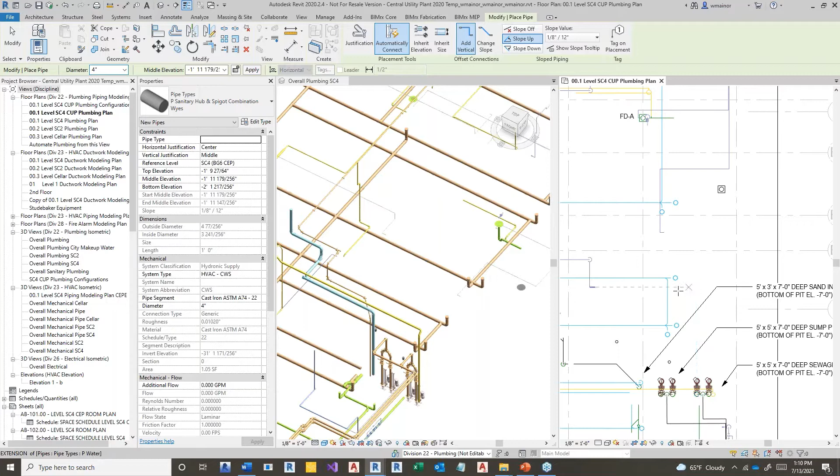So I wanted to model sanitary. Okay. Just like a power user, I'm going to heavily rely on keyboard shortcuts, and we'll talk a little bit about that in just a second. Draw some sanitary pipe. And in this case, I think I'm starting from the bottom. We've got an ejector pit where I'm just going to pinpoint. I'm not going to go very far. I'm just going to put an elbow in. The less button clicking I can do, the better.

The pipe that I drew doesn't have the right system, so let me fix that. We're a plumbing sanitary system. And I just want to make sure that the offset of this pipe puts me, I'm drawing some below ground pipe. So let's bring this down to something like -3 feet. Okay. So I didn't draw very much. And what I'm going to do is use an out of the box workflow where I can take the elbow that I drew and turn that into a tee.

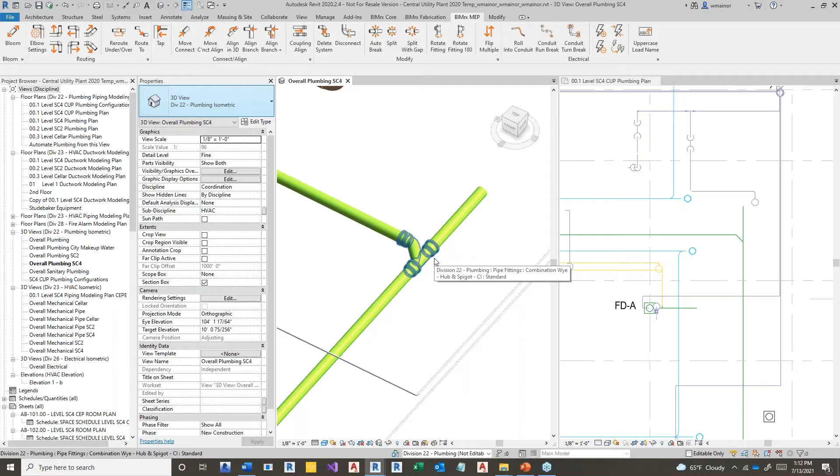Now BIMrx has a command called Bloom. And you can see here I've assigned it to a keyboard shortcut. So I can type my keyboard shortcut, and the Bloom command is going to extend duct or pipe out of every open connection that the fitting or the mechanical equipment or the plumbing fixture has. And furthermore, if the pipe that I drew had a slope on it already, then when I converted the elbow to a tee, the connector on the tee had a slope, and the pipe that extends out is naturally going to have a slope as well.

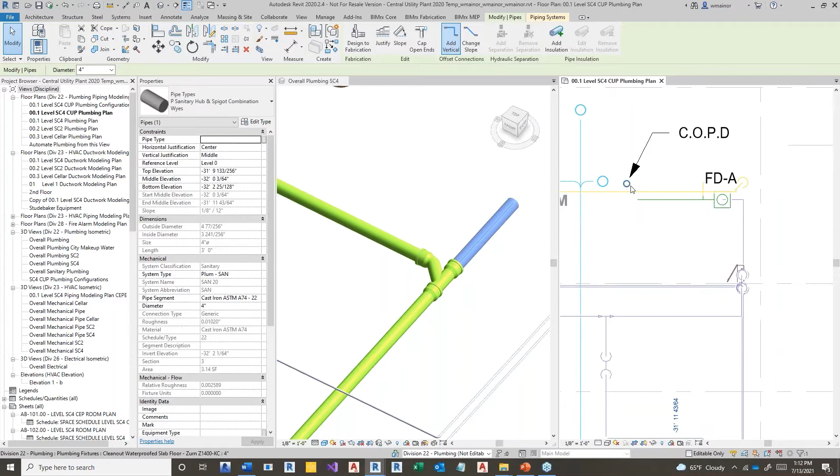And now I'm saying to myself, if this pipe needs to connect, maybe I've got a floor cleanout that I want to attach to, then I can start using commands to quickly draw pipe in different directions.

So BIMrx has an elbow up command, and I'm going to type the keyboard shortcut to draw elbow up. What it does is simply draw a vertical piece of pipe attached to my horizontal run, and it connects the two with an elbow without breaking the slope, just so I can put a vertical rise in.

Now I'm going to zoom out a little bit so we can see what happens. BIMrx has a command called move and connect, which allows me to click on an object that's in the right place, one that has an MEP connector. And I can click on an object that I want to move to it, in this case, the vertical pipe. It stretches the vertical pipe to attach to the clean out, and moves that horizontal run all the while without breaking the slope.

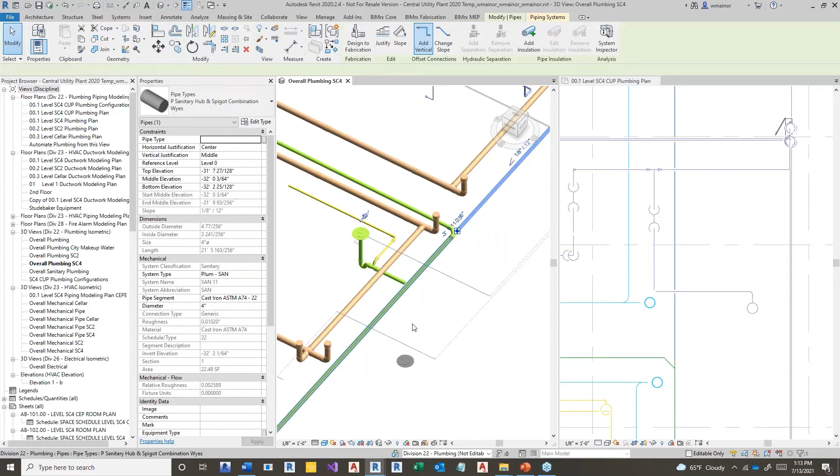The same is true for the pipe that's downstream of the T, and the same is true for that branch line I drew earlier. If I've got another clean out that I need to connect to, I can use my elbow up command and my move connect command assigned to a keyboard shortcut. I click on the clean out, and I click on the vertical pipe, and then it moves the second thing to the first.

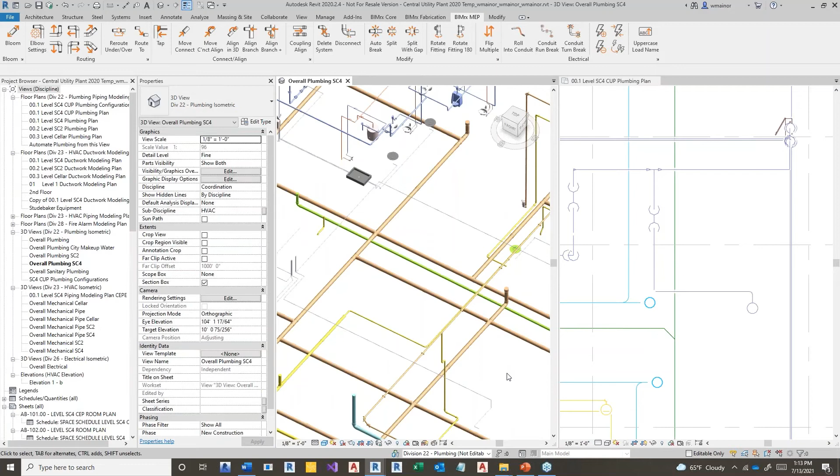You can actually see, if I were to undo that and redo it on the floor plan, you notice how it's not affecting the main. We're really minimizing the effect. I'm going to keep demonstrating this because it's something we focused heavily on, ensuring that nothing we do is destructive to the slopes that we draw.

Now, if we needed to draw a branch line to a floor drain, we can use the same bloom command I showed you a second ago. I'm typing my keyboard shortcut on the keyboard. I click the floor drain, and it extends pipe coming out the bottom.

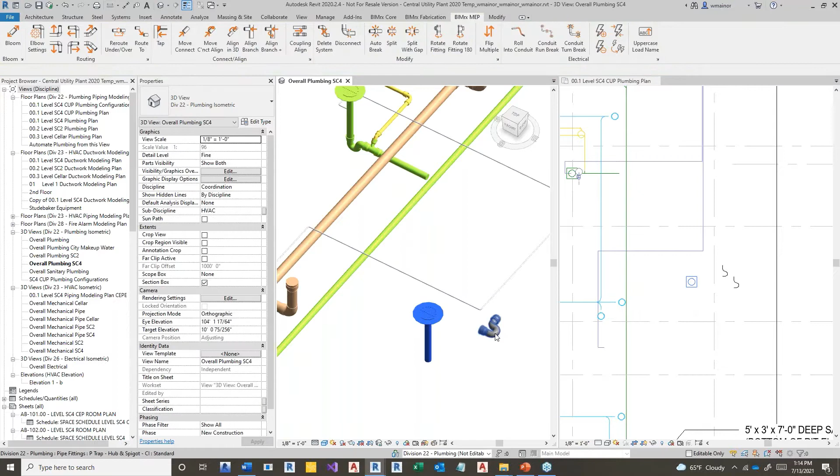If I want to place a pipe fitting, in this case a P-trap, I'm going to use my pipe fitting keyboard shortcut and place the P-trap nearby. The move and connect command is going to take the two closest connectors, so I just have to ensure that the closest connectors are the ones that logically make sense. I want to make sure the top is the closest to the drop.

Now, in this case, we used the move and connect command earlier to move two things that are already parallel to one another. But if I want to rotate an object, BIMrx has a command called move, connect, and align. That allows me to click on an object with an MEP connector that's in the right place, and the second object I click on gets rotated and connected to the first.

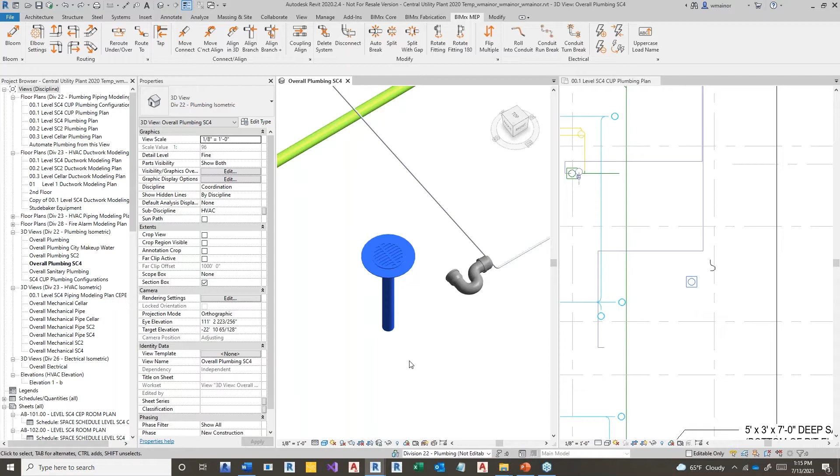Just to explain what's going on, I'm using solid color fills to indicate the system I'm connecting to. You'll notice, if I were to undo that, the P-trap I initially placed didn't have a system on it. If I redo that, it inherits the blue color of whatever system that is—I'm not sure if it's rainwater leader. The bloom command couldn't infer the system from the floor drain, but that's okay because we're going to correct that very easily in just a couple minutes.

Now I need to rotate the P-trap, and Revit does have a widget for doing that, but we've always found it very frustrating to work with. If my view were rotated in such a way, it wouldn't necessarily be apparent where that widget is, and the busier my screen is, the harder it is to see and click on. So BIMrx has a command called rotate fitting.

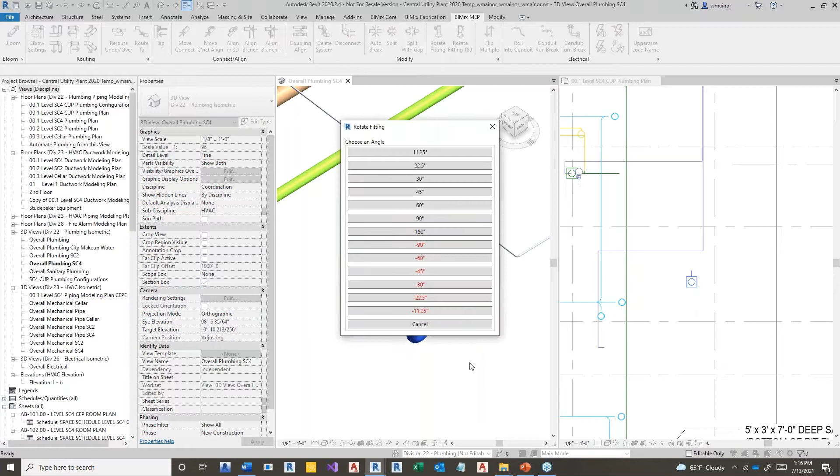We're up here like this. If I click on the rotate fitting command and click on the P-trap, Revit gives me standard off-the-shelf angles for typical pipe elbows. You'll see we have 90 degrees for a quarter bend, 45 for an eighth, 22.5 for a 16th bend, and so on. I mentioned earlier that the commands work for both pipe and for conduit and for duct. For that reason, we have a couple of angles that make more sense for conduit, though they don't really seem appropriate for pipe.

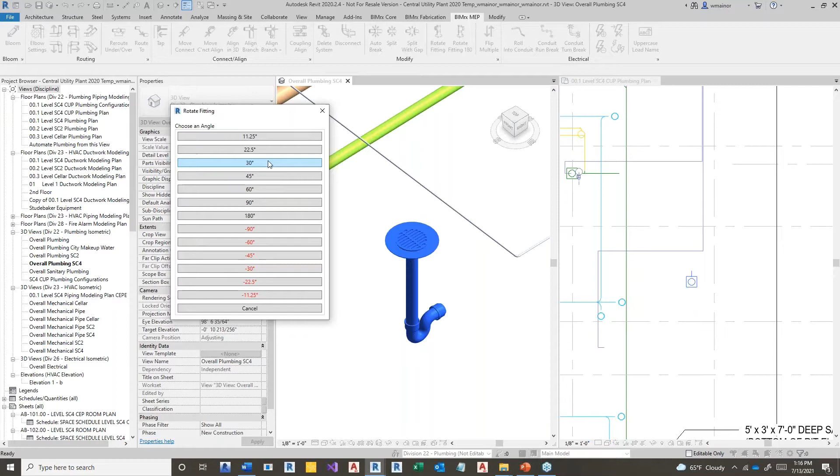We've got the 30 and the 60 degree. In this case, I want to rotate 90, so I'm going to click on the 90 option.

Now, once again, I want to start thinking like the AutoCAD power user. If I've got tools that can move and connect, that gives me a lot of freedom to start reusing work. And this for me was the biggest drag on Revit, that if we have to make connections, it's very difficult simply to copy and paste something. We always had more difficulty making a connection than drawing things from scratch.

But now that those connections are so easy, what I could do is come in and select something that's in the right place. I'm just going to verify in 3D that I've got everything I need selected, then go to my floor plan and do something like that. I guess I don't really need the P-trap. Okay, I can copy it.

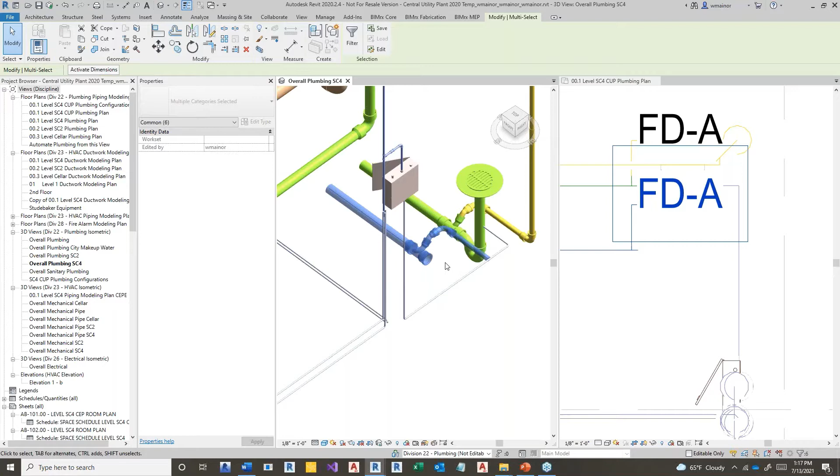And now, with everything selected, I'm going to run the move and connect command again. So I type the keyboard shortcut, click on the thing that's in the right place, and click on the thing I want to move to it. In this case, it was the vent tee.

And now you can see that, like the Bloom command earlier, it selected the system, but it guessed the system wrong. Green here is the indicator of my sanitary system, but that's okay because BIMrx has a command called delete system.

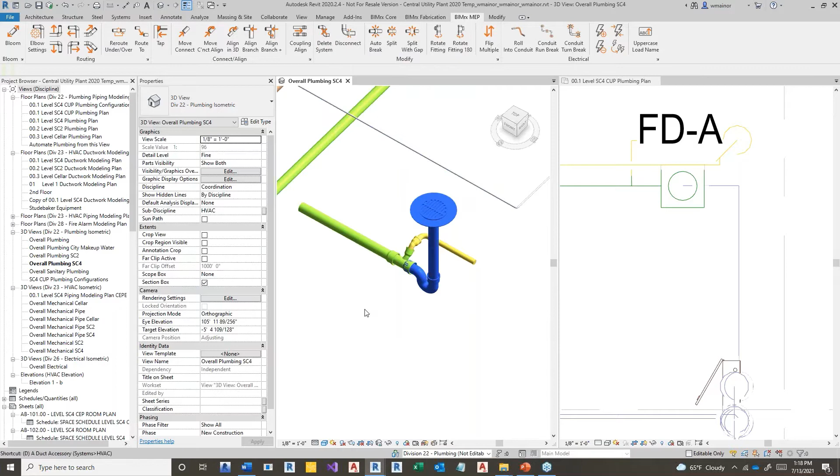You can see I've assigned it to a keyboard shortcut, DS. I'm going to use the DS command and click on the pipe that's on the wrong system. It voids the system, and now the sanitary fills in the void.

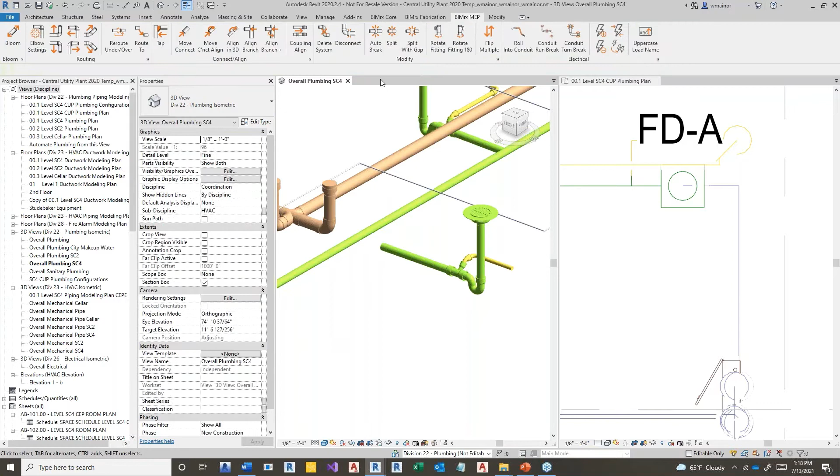And now for me, the final difficulty I have with Revit is that with sloped piping especially, the branch line would have to connect into the main at a very specific coordinate in 3D space. Revit's extend command, if I go to the modify tab of the ribbon, there's an extend command that looks like this. Out of the box, Revit doesn't assign that to a keyboard shortcut.

So what I did was I went to the keyboard shortcut dialog box, and of course, there's a keyboard shortcut for that. KS, Kilo Sierra, takes me to the keyboard shortcut dialog. What I did was I just searched for the command extend, entered EX in there, selected it, typed EX, and clicked the assign button.

In that same regard, I've done the same thing for many of the BIMrx commands. So for BIMrx MEP, this is where I assigned EU to elbow up, ED to elbow down, EL to elbow left, and so on. I'm just going to hit the OK button.

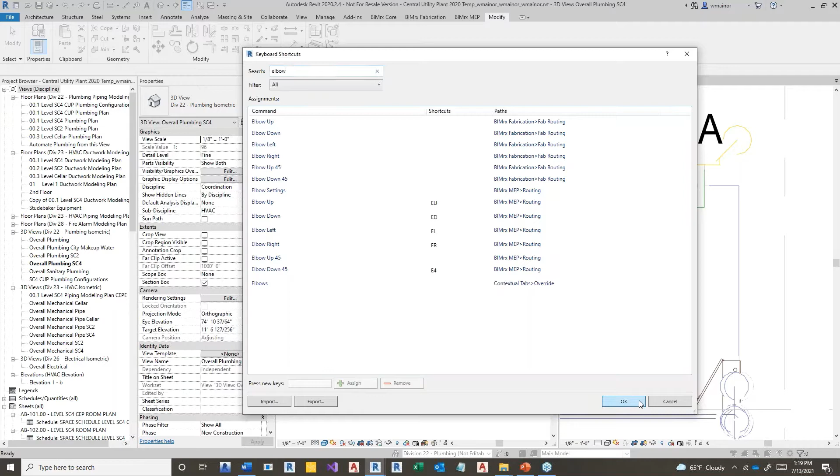With the extend command, if I was going to click on the main and click on the branch, Revit's not even going to allow me to do that in a 3D isometric view because the two aren't aligned. I could go back to my floor plan and do the same thing. I can click on the run and click on the branch.

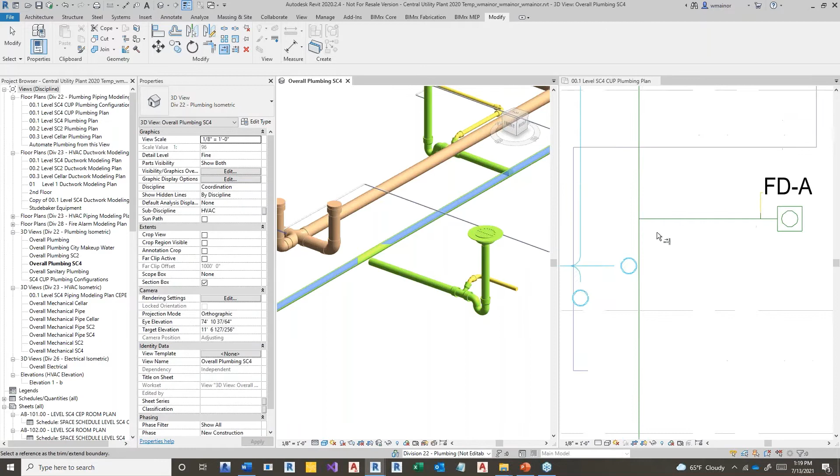But now this is that point where typically Revit will start giving you a warning message about not enough room to place the required fittings, or no auto route solution was found, because the two don't perfectly align. So at this point, we watch our detailers cutting sections, opening up views, adjusting visibility graphic overrides, and just spending minutes and minutes of time doing work that doesn't put work on paper.

In other words, my only goal here is to put a combination Y in to connect the run with the branch. It's not to cut a section, it's not to adjust visibility graphic overrides. And when we watch our designers do that, they'll spend 6 to 10 minutes adjusting sections every time they need to create a new one.

So we look at that and say to ourselves, well, if there are 30 floor drains we need to connect inside of this MER, and we're spending 6 minutes per floor drain, that's 180 minutes just connecting branches to mains. That's 3 hours. And if we can eliminate that with a button click, then that gives our clients and our detailers a competitive advantage and an ROI.

BIMrx MEP has a command called align branch. Align branch allows me to click on the main and click on the branch, and all it does is simply adjust the branch to the main. Here it looks like there might have been a broken connection.

I'll heal that in just a second. Now I can use Revit's extend command, just the out of the box command, and it puts that combination Y in for me. Finally, with this broken connection, I already know the keyboard shortcut to heal that. That's for move and connect. I click on the thing that's in the right place and the thing I want to attach to, and it moves the second thing to the first.

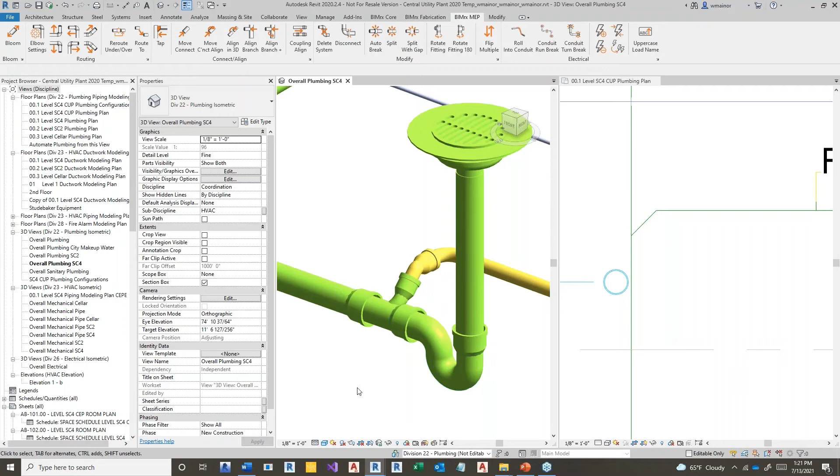Of course, if we wanted to continue this vent line, I can always use the elbow command to extend that vent line up. And then, if I needed to connect this in, I could go up to another run. Maybe I'll use a rotate fitting command to rotate this elbow 45.

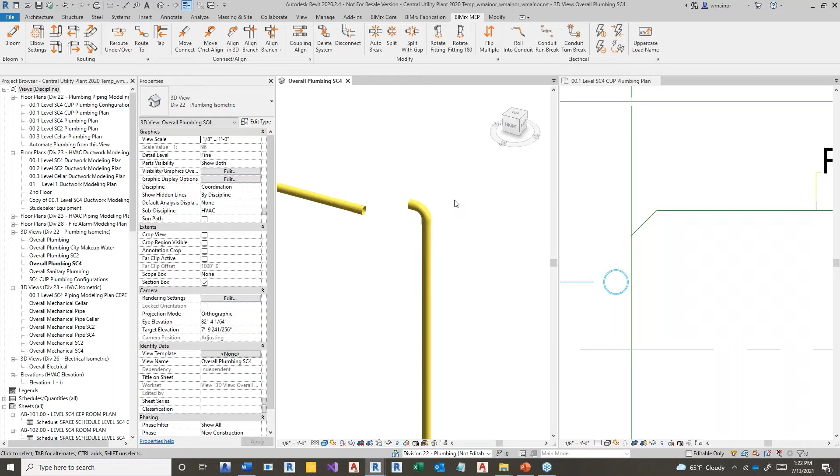If the command went in the wrong direction, no problem. I just hit the enter key to repeat the previous command. I click on the elbow, and we're going to rotate it in the opposite direction twice as much. If 45 went in the wrong direction, -90 will set it right.

Then I can use Bloom, and remember that branch align command I used earlier to connect the branch in with the run? It doesn't only work on the XY plane, it works with any two pipes that are not parallel in any sort of coordinate plane. So if I use the branch align command, this time my vent over here is in the right place.

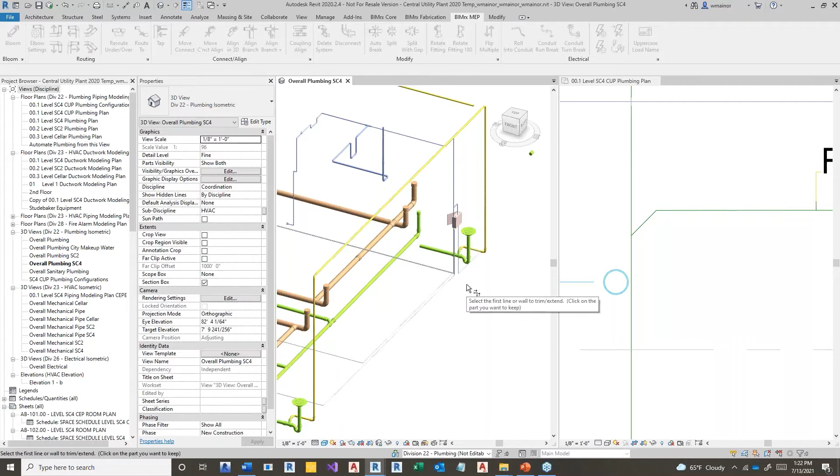And this time that vertical needs to adjust to trim to it. Now I can use the trim command and connect those two in very easily without having to align the two. That branch align command is what's going to allow me to quickly ensure that two pipes can trim or extend into one another without me having to switch views or cut sections.

I'm going to use the extend command. Hopefully I got enough space to put the T in. It tells me there wasn't enough room, so why don't I just take this out? I'm going to stretch it. We're going to extend, and now I can delete the pipe.

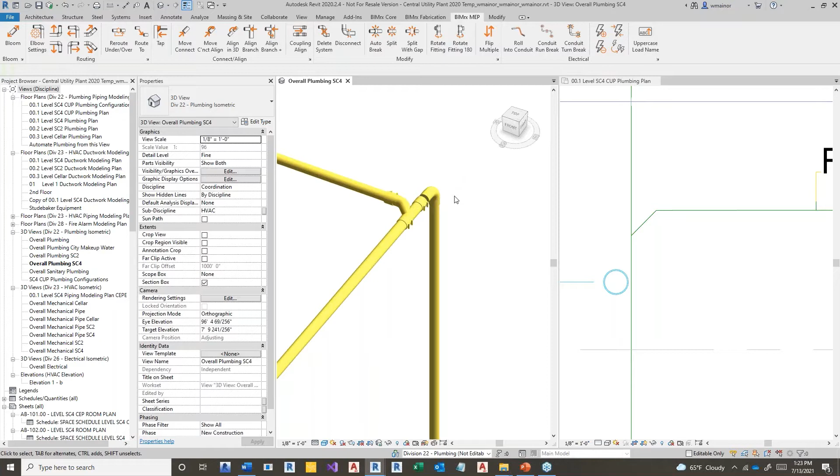I think you can see there it was putting in a combination Y, where really these should just be sanitary T's, I guess. So we're going to go sanitary T. I'm going to extend those two in together, and then use the move and connect command to connect that elbow in the pipe.

Now in this case, it looks like something prevented that T from getting pinned. In other words, I really expected the move connect command to stretch this pipe back. Maybe the reason is there simply wasn't enough room to.

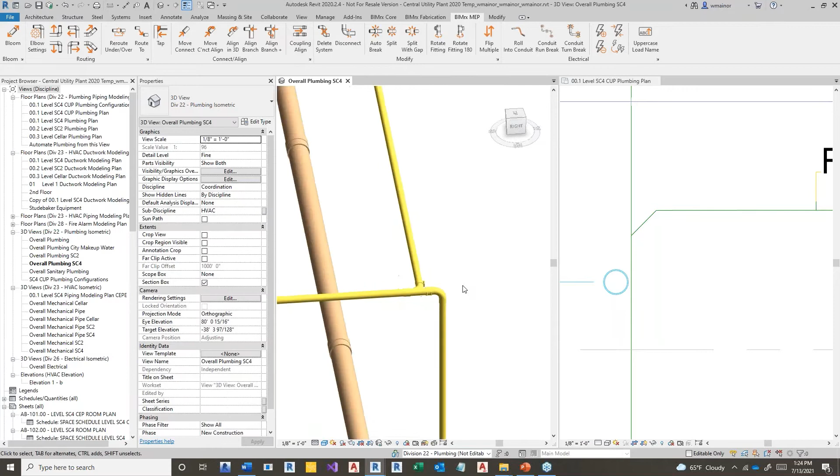So why don't I delete the pipe? I'm going to use the move and connect command again, and I'm going to grab that coupling and grab the elbow, and I think that's a better solution.

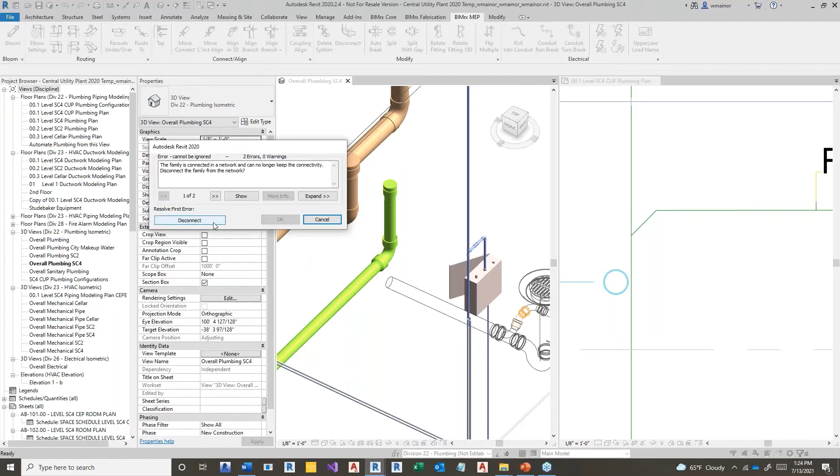Once again, I can use the align branch command to align my branch to the main, and sometimes you can see here I might have had a small length of pipe connecting the vent T to that elbow, in which case Revit needs to delete it. It would have doubled back on top of itself. But that's not a problem because we've got tools to fix that very simply.

I'm going to use the move and connect command to click on the vent T and click on the elbow, and we'll try that one more time. I think I used the wrong keyboard shortcut, so I got an unlikely error. If I use the proper keyboard shortcut, the elbow connects to the vent T.

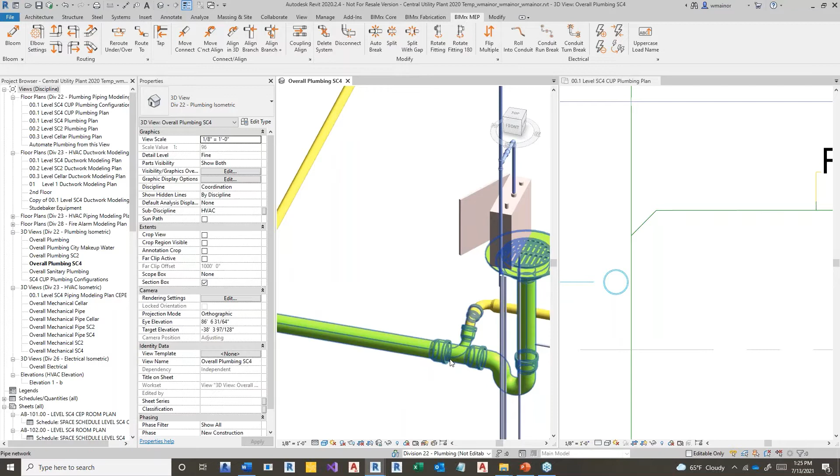And here, as I tab through, you can see here's the reason for the broken connection that we had before. Once again, I'm going to connect these two guys together, and now if I tab through, everything's connected.

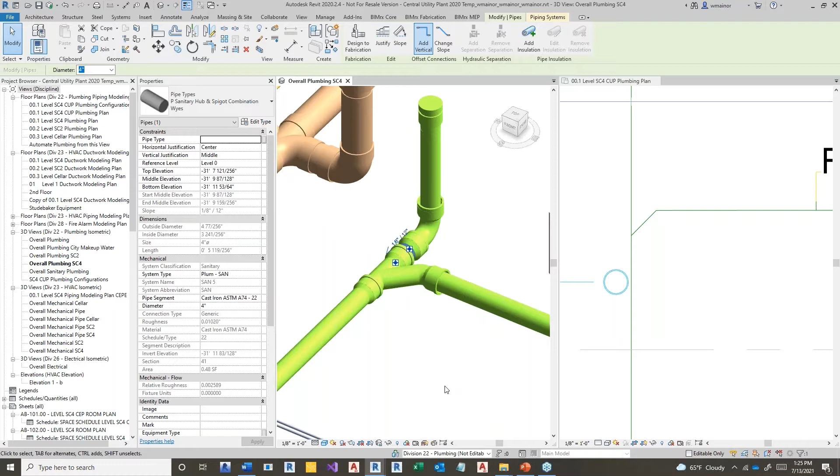I am not sure if I'm going to have enough space to put the T in here. So what I might just do is, like I did before, I'll stretch these two out, extend together, and there, the move and connect command, as long as there was enough space, it stretched the pipe back, assuming that that T was pinned in place. And you'll also notice when it stretched it back, it preserved the slope again. So I'm going to keep clicking on these pipes to verify that all of my slopes are preserved.

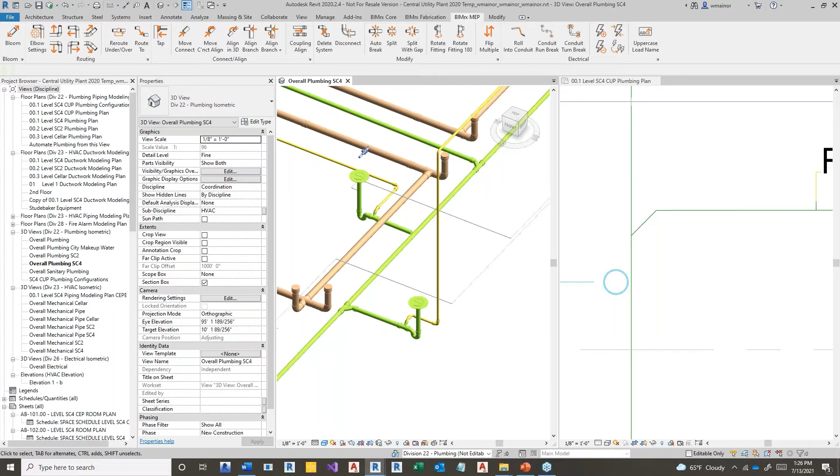So now that we've got these tools that align, trim, and extend, now we can start really thinking like the AutoCAD power user. And I can think like somebody who's going to build out assemblies and reuse them so I don't have to redraw them every time. In other words, if I can save 6 minutes per floor drain, that's great. But if I could save 10 minutes per floor drain, that's even better. So why don't I take this assembly and make it into an official assembly, a Revit assembly. And we can create a floor drain type.

The assemblies are going to live inside my project browser. So I'm going to scroll all the way down to the bottom. And I can drag and drop that assembly onto the screen. And I can place multiple instances of it. Okay. Now, of course, we would have an architectural background where these should line up to, right? But in this case, I'm kind of winging it here. I'm going to rotate 90 degrees.

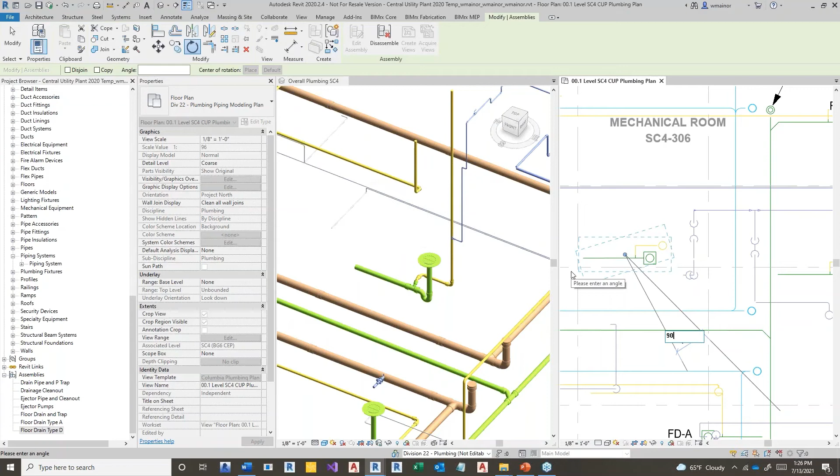I'm going to disassemble it. I'm going to use the branch align command to pick the run with the branch. I'm going to use the extend command to connect them in with a combination Y. And we can do that for every one of those. So anything that we can build out as an assembly and reuse, we now have tools that will allow us to align and connect them with just a few button clicks.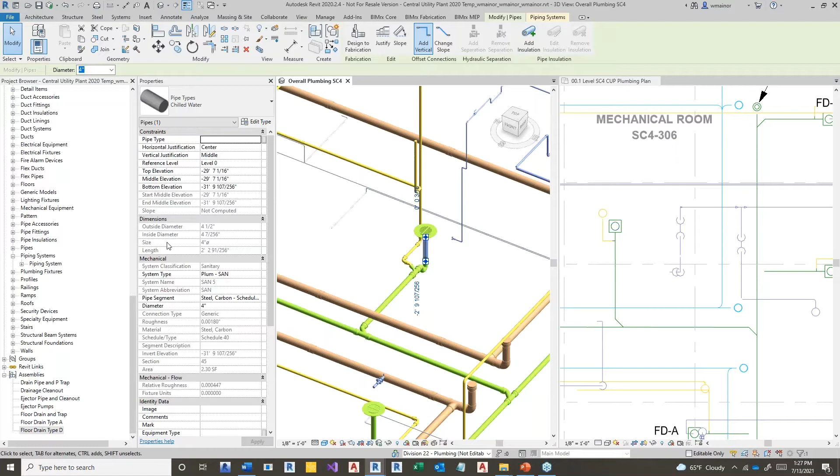And now in this case, maybe we did something that wasn't up to code. If I were to select that vertical drop, I can see what its length is here. It's a little bit too long, so maybe we need to shorten that up. Say we needed a different configuration here, something a little bit more complicated. Maybe what I can do is I can delete the T out, and then to heal the two pipes together, I'm going to use my trim command, and maybe we need to bring this up higher. We'll bring this up to like -1 maybe. Hopefully that gives me enough space.

We'll test this out. And then say I needed to come in the top, I could use my elbow down command to put a drop in. I use my branch align command to make sure that it's aligned. And I use my extend command to connect it in with the combination Y. And then once again, I just double check the pipe and verify that the slopes are still intact, and they both are, and I'm pretty happy in this case. But let me undo that, because maybe we didn't want a combination Y. Maybe we actually wanted a Y itself.

So what I might do is delete the pipe from the drop, and I'm going to use the rotate fitting command to put this at a 45-degree angle. Once again, if it goes in the wrong direction, no worries. I'm just going to hit the enter key again. I'm going to go -90 in the opposite direction. I'll use the bloom command from BIMrx to extend pipe out the end. I'll use the branch align once again just to make sure that they're lined up properly.

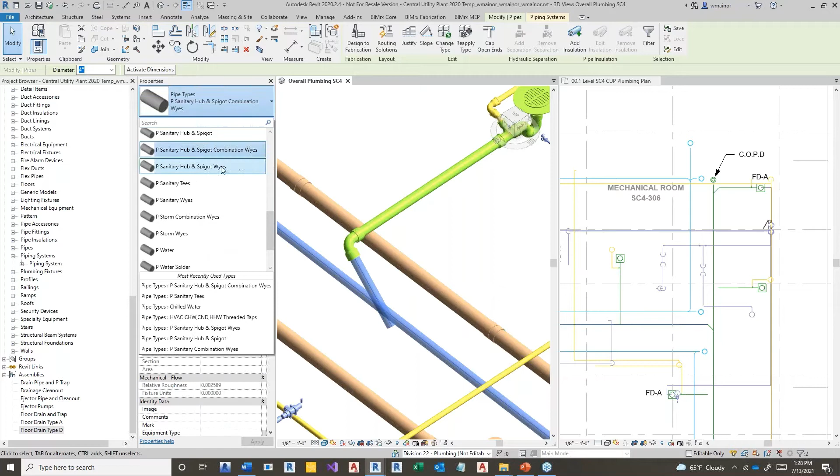And then I'm going to grab my two pipe types and make sure that they've got a routing preference that's going to insert Ys and not combination Ys. Then finally, I can use the extend command to connect the two, and in that way, we can very simply connect a branch line to a main using Ys. Okay.

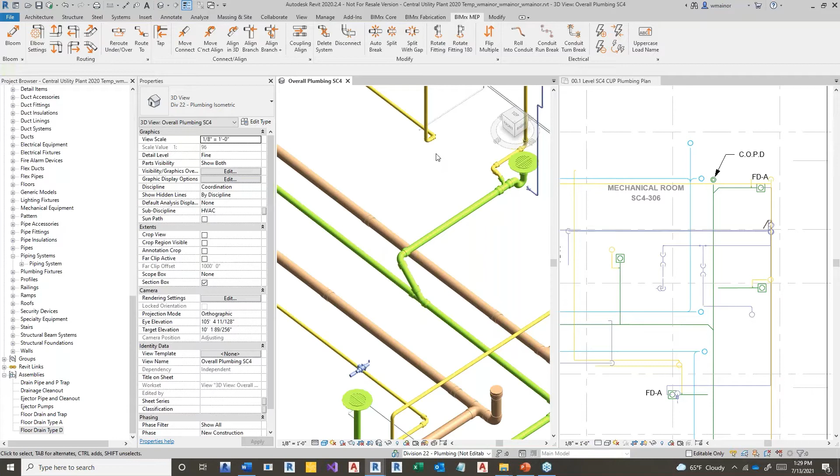So let's switch gears for a second, and I want to show how these tools would work together to do some mechanical piping. And here I've got a couple heat exchangers we can connect into. We have to connect into some mains. And I think just like before with the floor drain, I would start by using the bloom command to give me something to bite onto. And in this example, you can see that the pipe comes in with the wrong system. I think the red color is telling me that it's a heating hot water. So I'm not worried because we're going to delete those systems in just a second.

If I wanted to, though, the delete system command from BIMrx that I showed you earlier would allow me to click on a mechanical equipment with multiple systems on it, and it would delete all of them. So that's a quick way to flesh them out. But once I start using those elbow commands, it's going to once again try to guess the system, and it's probably not going to get it right. So that's okay.

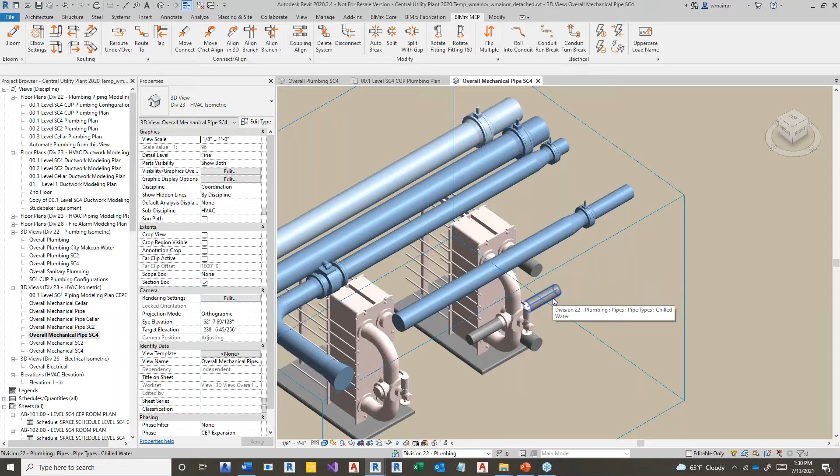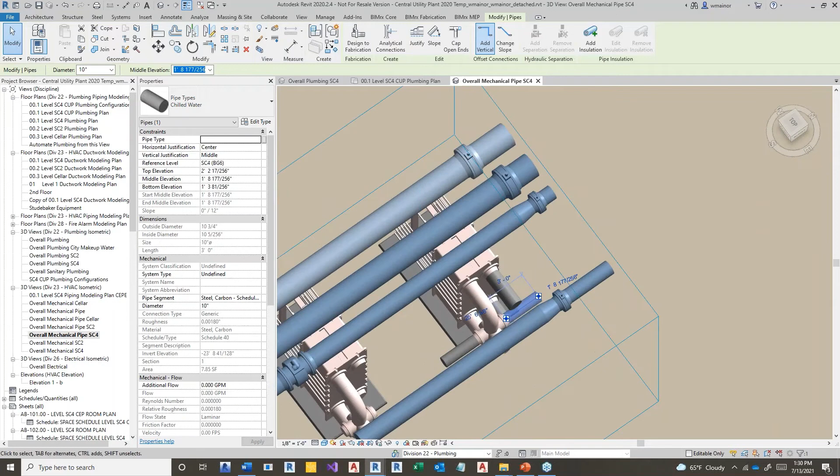We're going to wait until we make the final connection before we get the system. Now, having said that, if we did have the system right, then the elbow commands would pick the correct system. But it's just because now we're starting at the mechanical equipment, and the tools can't predict what systems you might have in your database and which ones are appropriate for which type of connector. And we also don't want you spending a lot of time fixing your content library to work with our tools. Sometimes we just like the tools being simple and, dare I say, like dumb.

So in this case, we've got a couple options for things we can do. I can use my elbow up command to draw pipe going up. And now the elbow right command, if I run it on the top of vertical pipe, it's going to look at the pipe underneath it. And it's going to assume that I'm looking towards the end of the pipe that I'm clicking on. So in this case, right is this direction, left would be in this direction. So I click on elbow right.

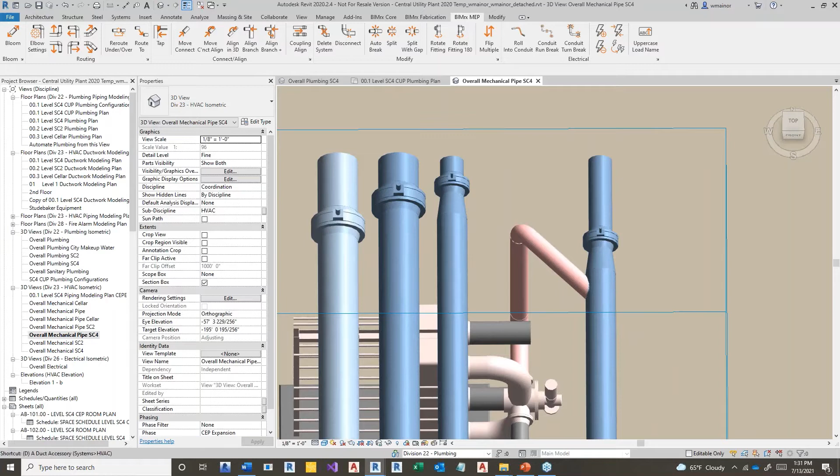Okay. I'm going to take the pipe that I drew, and maybe I'm going to rotate this down at 45 degrees. I can use my branch align command that we were using earlier, and I can use the extend command, whoops, to connect these two in together. And now finally, once I've got the pipe in the right place, now I can use the delete system command to make that go away.

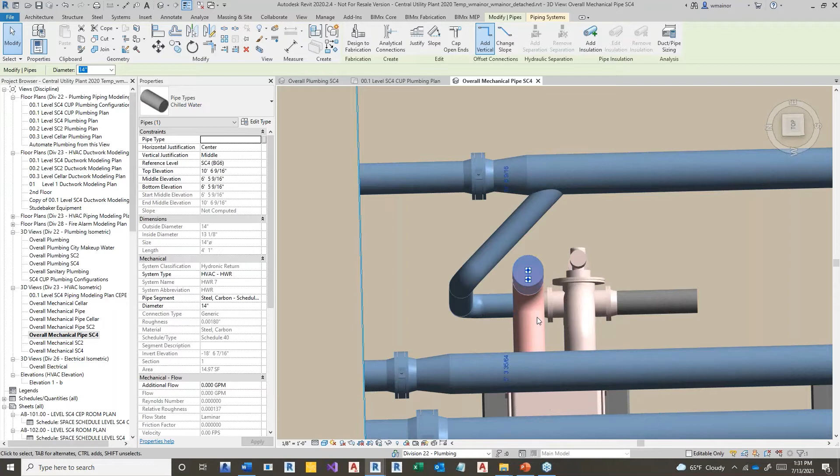And then if we wanted to, on the same token, I could use an elbow up command. And now, once again, when I'm clicking on a vertical pipe, elbow right is going to assume I'm looking down the shaft of the pipe that's attached adjacent to it. Okay, I choose elbow right. And now we did have that trick earlier where you saw I dragged the connector to a 45-degree angle. But we could use BIMrx tools as an alternative.

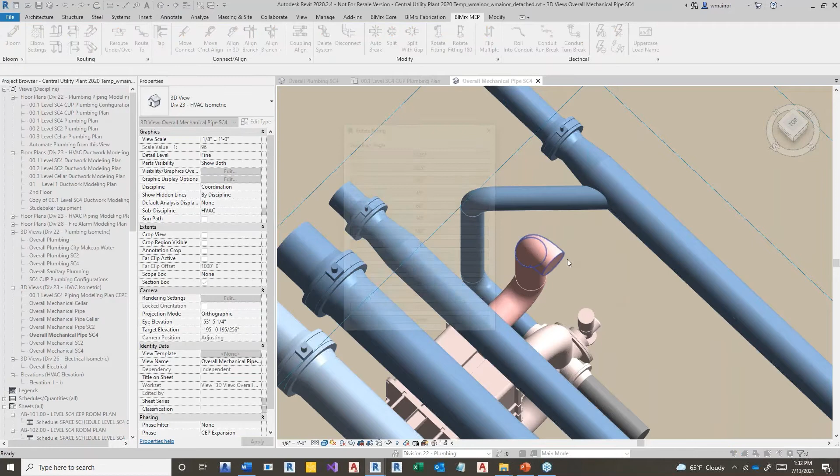I could delete the pipe that's horizontal. I could use the rotate fitting command to rotate this 45. I can use the bloom command. I can use the align branch command, and I can use Revit's extend command to cut those in. Then finally, delete system is going to make the system type go away. Now I realize here I'm oversimplifying a little bit.

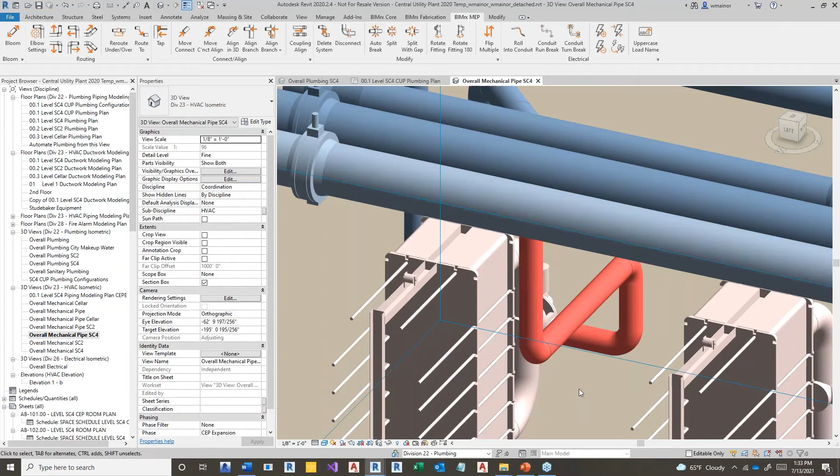In this case, we want to go elbow up. And here, this might be a little bit tricky. I'm going to use an elbow right again. It actually does what I want. Then I'm going to go elbow up. And then if this is my condenser water, maybe what I'm going to do is use the branch align and the extend. And then I can delete system to make those two go away.

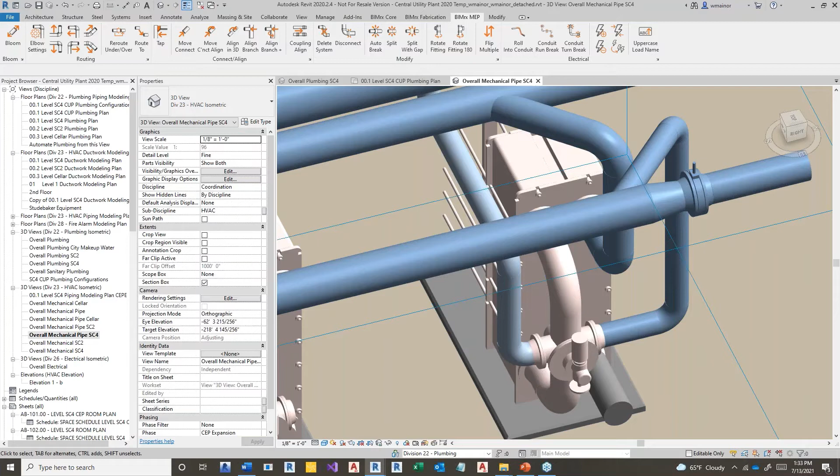Okay. Now finally, this was a very simple system. Of course I can come in and I can make adjustments. We might want to bring this up to 7 feet. Maybe I want the elbow to connect directly to the reversing valve on the heat exchanger. So I'm going to use the move and connect command to attach the second object to the first.

If we wanted valves, I can use my pipe accessory command. And let's see if we've got some, maybe we've got some butterfly valves in here. All right, yeah. And if we're talking about chilled water, what size are we talking about? 10 inches? Let's make this a 10-inch valve. And I've got a special valve here that I could put flanges on it if I wanted to.

And now I showed you that move and connect command, or the move, connect, and align command. Well, BIMrx has a command called split with gap that, if I wanted this valve in the middle of this vertical, allows me to click on 2 places on the pipe, and it's going to create a gap.

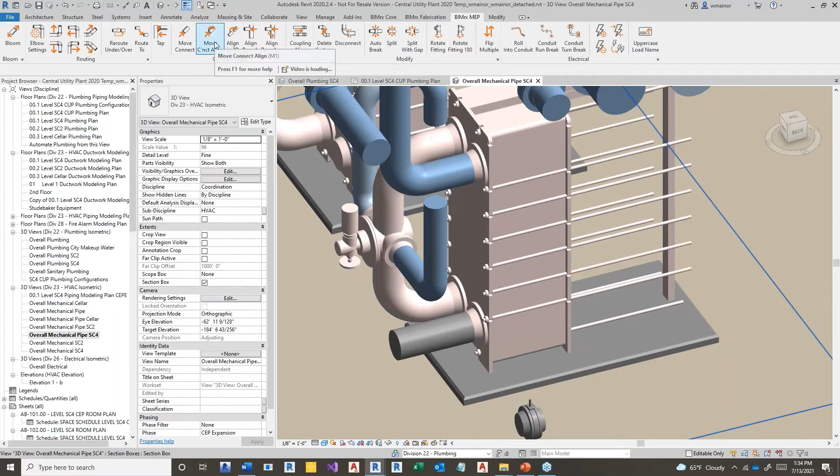Then I can use the move, connect, and align command to click on either one of those two pipes, and then it rotates the valve and attaches it to the second. Okay. Now, of course, if I was going to create similar, Revit does give me the ability to snap a valve into an existing pipe. And in many cases, that works really well.

But if you've worked with Revit for a long time, you also know there's a lot of situations where we get into a large model in a 3D view and it becomes very difficult to ensure that the valve snaps to the correct pipe. So what I'm demonstrating is simply an alternative workflow that gives you a little bit more reliability.

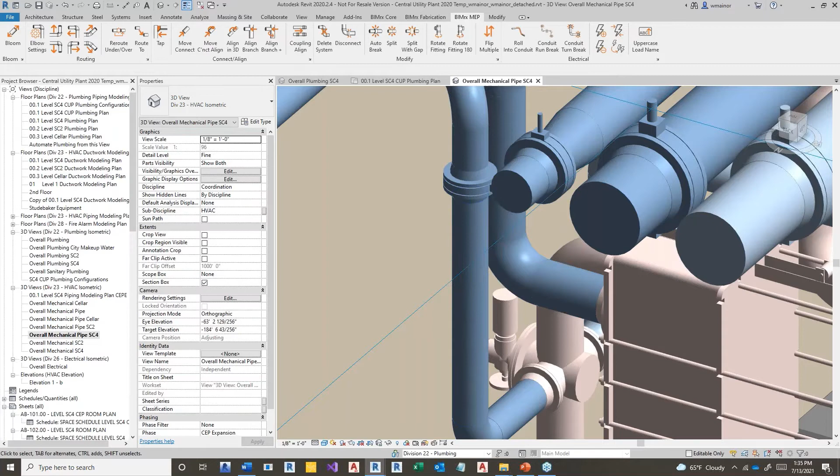And now finally, I can use the move and connect command. I click on the valve and I click on the pipe. It stretches the pipe in this case in order to heal the gap. And oftentimes the valve is going to attach directly to an elbow, so I can do something like that. And now we even have freedom, we can use the rotate fitting command if we wanted to rotate this at 45, okay?

So if I'm talking to HVAC designers, have you ever drawn a PRV station and you put in a whole bunch of really large OS and Y valves and you want them rotated out at a 30 or a 45-degree angle for coordination? So that rotate fitting command is an easy way to do that without using Revit's out-of-the-box command.

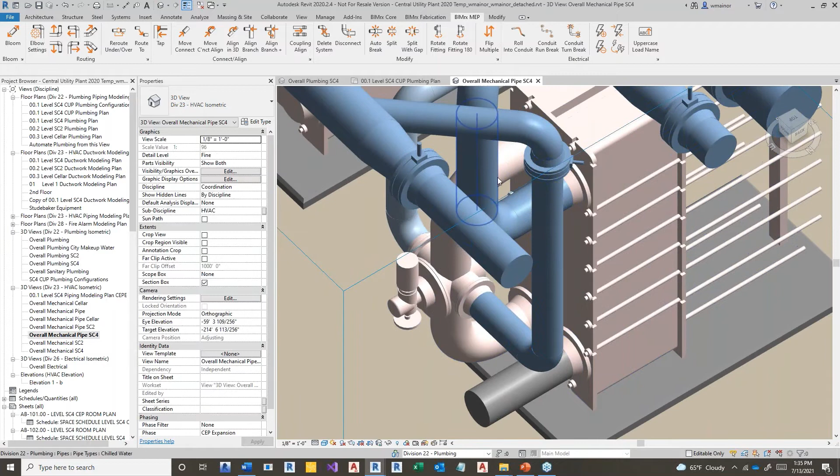Okay. So the commands work with HVAC pipe as well as they work with plumbing pipe, but they also work with electrical conduit as well. So if we were inside of an electrical model, once again, I'm thinking in terms of the AutoCAD power user, and I'm trying to reduce the number of button clicks. So for that reason, one of my favorite commands in out-of-the-box Revit is the create similar command.

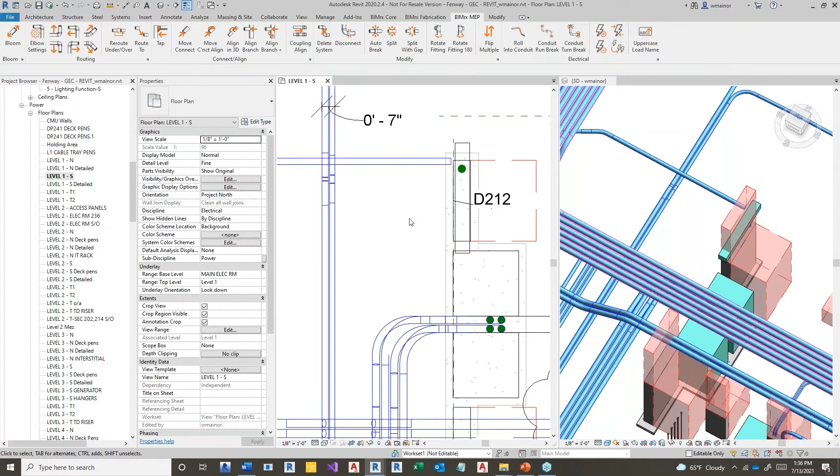In other words, if I was going to use the conduit command, I would have to run the command, specify an offset, pick the routing preference for the pipe or the conduit type, and then potentially set the diameter. And for pipe, I'd have to set the system. Revit's create similar command has a keyboard shortcut CS, or Charlie Sierra. I select something that I like, I run the command, and now it populates everything with the right types for me.

Maybe in this case, I'd like it to be a little bit smaller in diameter, so I'm going to draw 2-inch. I'm just going to draw a short length of pipe and follow that up with Revit's offset command, which allows me to space the conduits on my rack 4 inches apart. And then I can just run down the rack. Maybe I'm going to move these so they're aligned to the pull box. And then I can use Revit's copy command.

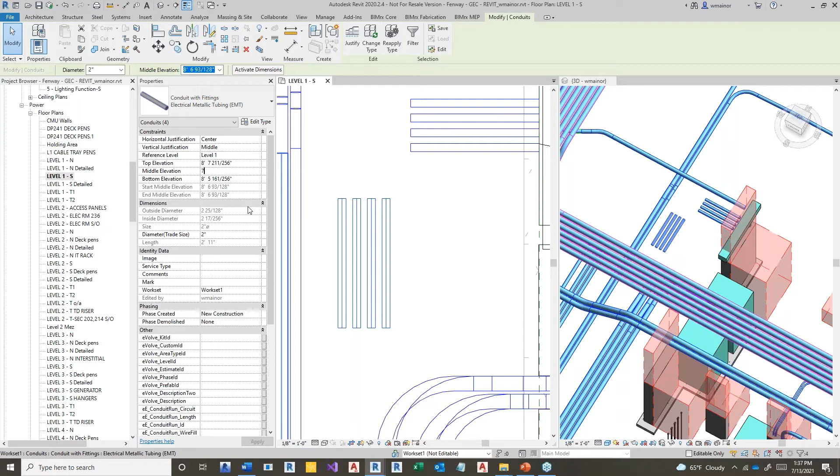Revit's rotate command to rotate this 90, and then say I wanted my whole rack to make a 90-degree bend, and we're coordinating around something, so we want to bend our elbows down maybe at a 30-degree angle, and then the offset of this rack could be much lower. Maybe I'll bring it down to 7 feet. So I could, on a floor plan, use the trim command, and Revit would attempt to put elbows in and connect them with a vertical drop. But that's, of course, not what I want.

So BIMrx has a command that's specific to conduit, and it's called roll into conduit. The command allows me to click on a conduit at one elevation, and then a conduit at a different offset, but perpendicular, just like that. And I can specify the angle that I'd like. In this case, I could say 30 degrees, or since we can bend conduit in any angle we want, I could say I'd like to roll this in at 15.

For me, I think 30 degrees makes sense. So let me do that. And what the command does is it places a 90-degree elbow at the conduit I clicked on first, and then the 30-degree angle that I picked at the one I clicked on second.

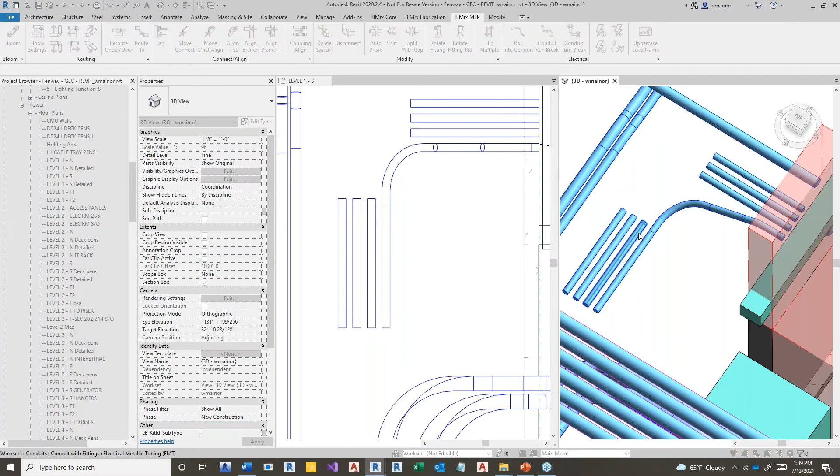So I can run the command again, click, click, OK, enter as previous command. So just like that, I can run through the rack, and I can basically put all those rolls in. If I was to undo that, the command could run in the opposite direction, where if I clicked on the bottom first and the top, you can see how the two vary. Okay, so whichever way we would like the conduit to roll, both options are available to me. Okay.

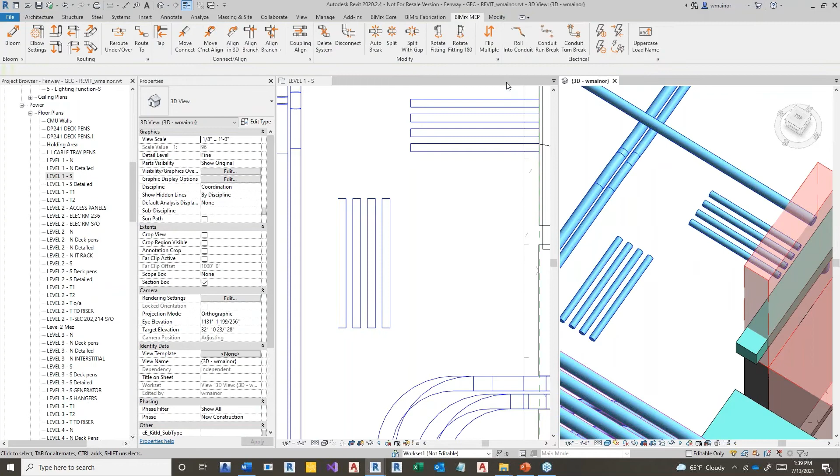Maybe this is too far down, so let me select this, and I'm going to bring this up at something like 9'8". And I'm going to use the command again. I click on the top and I click on the bottom, and we're going to choose 30 degrees. And sometimes this is going to happen, right? If there's not enough room between the two conduit elbows to draw the conduit, Revit, of course, can't draw it in there. So it's going to tell me it needs to delete the element. But nevertheless, the command still puts the elbows in.

And what that allows me to do now is I can use Revit's or BIMrx's move and connect command, and I can click on the two conduit, and it moves the second one to the first. So if I was to tab select the two conduits, here I can ensure that they're both connected. So once again, I can roll into conduit, I can click 30, I ignore the warning message, and then I move and connect the gap there.

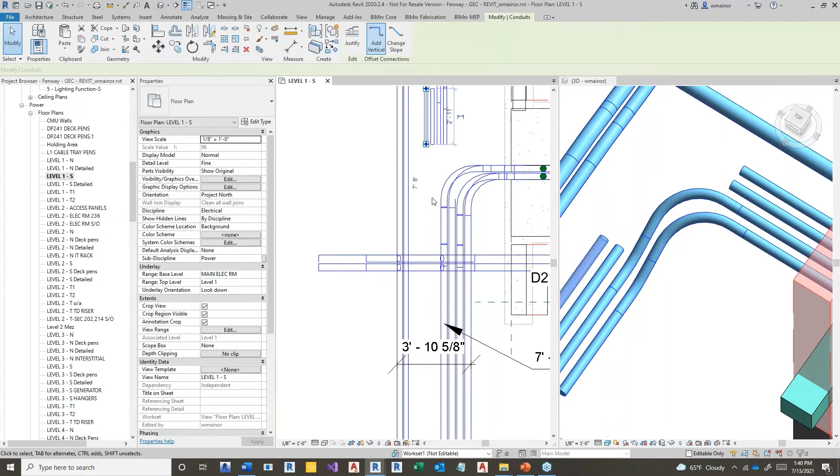Otherwise, like I said, we talk about these things as being assemblies, so we could always maybe take advantage of copying and pasting. But I think maybe that's enough, and we might move on a little bit. If we were to take one of these runs and stretch it out, okay? Eventually, we might need to connect into, maybe there's a junction box that we want to attach to. And there's some vertical drops in here. It looks like 2.5 is the right size after all. So I'm going to use Revit's match properties to correct that. Okay. And now with conduit, I'm just going to draw some coming out at some slight angle.

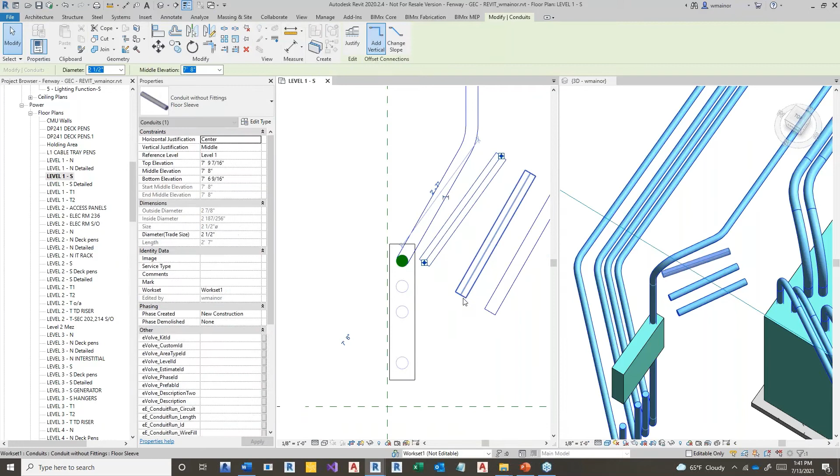And the crux for me, once again, if I need to trim these two together, Revit's not going to allow me to do it because the two are not aligned. So I use my branch align light command that we've seen both for plumbing and mechanical. Then I can use the trim command and the two are perfectly aligned. If I wanted to take this, and once again, we can offset it. Maybe this time we're going to offset something like 8 inches. We can put 4 in here. We may need to rotate these. Whoops. We may need to rotate them a little bit, right, in order to get everything to fit.

But I can use my branch align to align and trim. Branch align to align and trim. And then at that point, I can trim that conduit to that. Now, of course, the diameter probably has to match. So let me just delete those guys real quick. I'm going to use the match properties again because these should have all been 2.5 inches. I'm going to use my trim command to connect those two.

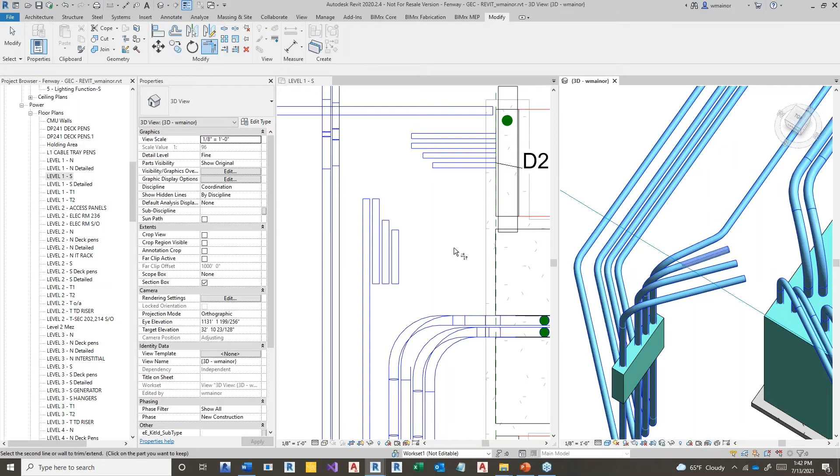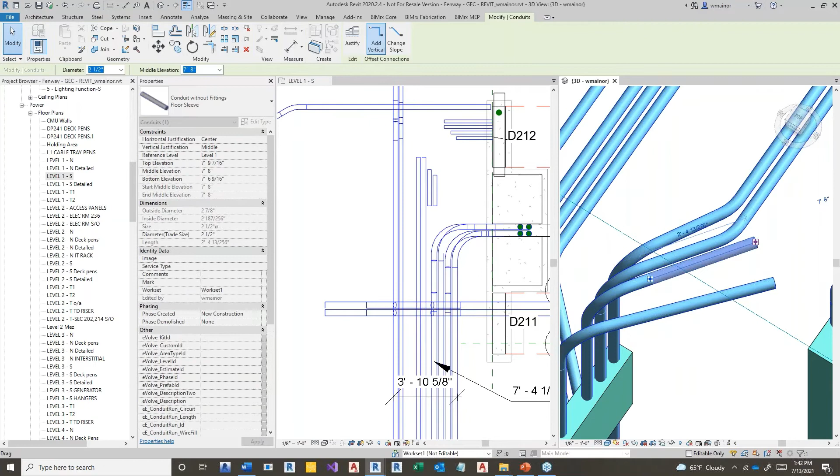I guess I can't do it view to view. I was hoping I'd be able to do that very easily. There we go. This one might throw an error because I may not have enough space. So in this case, I might just have to rotate it down to a more slight angle. And then I would be able to trim those together, I think. Oh, maybe we're not at the right offset. So I'm going to use the branch align to realign those two and then trim them together, and they fit together pretty nicely. Well, my angles are a little off, so I'd have to spend some more time.

Looks like somewhere we got a junction box, and those usually come in because there's a size mismatch. But can we fix that? Yeah, maybe we can. If I were to use my move and connect command, connect those two guys together, the angle's not going to work. I'll tell you what, let's delete the elbow.

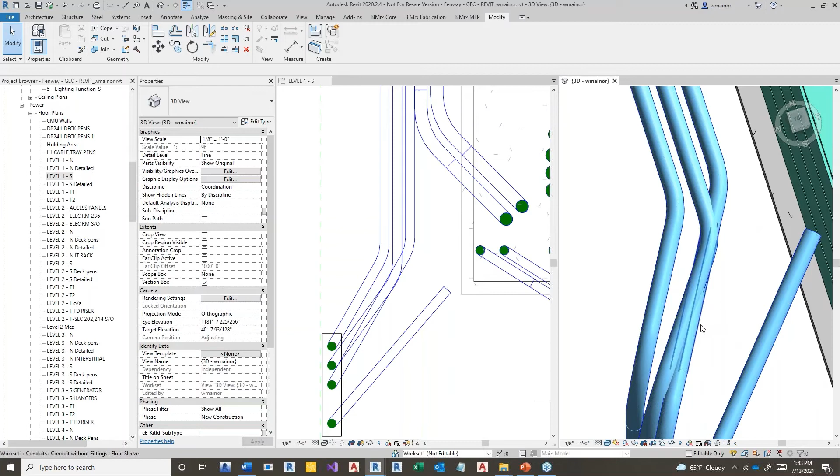I'm going to use my move, connect, and align command, and then I'm going to use my trim command. Okay, so of course there's overlap there. It doesn't look too great, but I think we're doing pretty good. Now, with the commands, there's other ways we could do this, right? We're going to switch all these to 2.5.

And we could also use the commands that I've showed you already. We had the elbow left command, for example. We do something like that. I can delete the conduit coming out the branch. I can use the rotate fitting command to rotate this at 40 or 30 degrees. Okay, and then I can use the bloom command.

What you're looking at right now is essentially a beta version of the new release of BIMrx that will be coming out sometime within the next 6 weeks, I believe. I can't promise that, but very shortly. This is going to be the late summer release.

And the new release has a command called elbow settings, which if I click on it, these are the options which help me define what the length is for all of the blooms and the elbow commands. So here you can see my default bloom length is 3 feet for pipe and conduit. If I were to set that to 5 inches, hold on, let me just make sure, 5 inches.

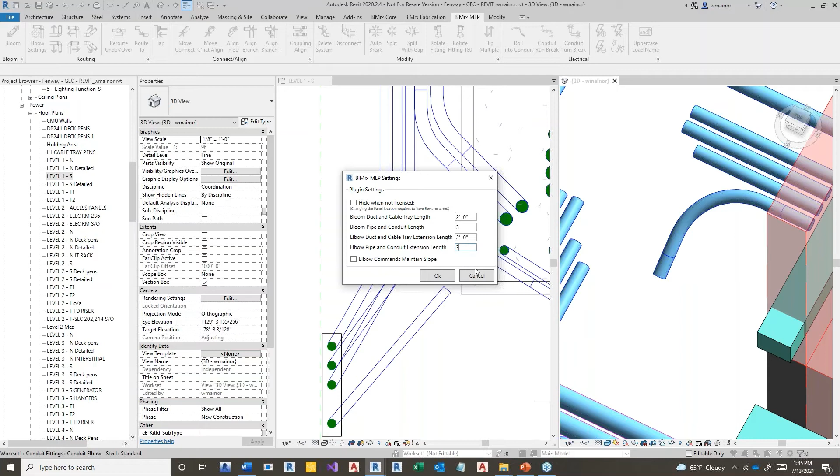Okay, so one of the most popular feature requests we've had for this tool is for the ability to customize the default lengths. If it was set to 0, the command's going to default to some multiplier of the conduit diameter to result in the fewest number of errors. But maybe elbow, pipe, and conduit, this would be for all the elbow tools. Let's get a 3-foot length. I'm going to run the bloom command again.

Then in that case, I can use my elbow, my branch align. I can use my trim command. And unfortunately, when I trim using Revit, it won't put the conduits in the same way that roll command does. So you see the benefit of using that command. So here I would have to stretch out, trim, delete, and then move and connect.

So there's a couple different ways that we can combine the tools in different variations in order to get the same scenario. In this case, what I might do then is just copy this multiple times. I can move and connect, move and connect. And now there's another command that I haven't shown you yet. It's called simply align in 3D.

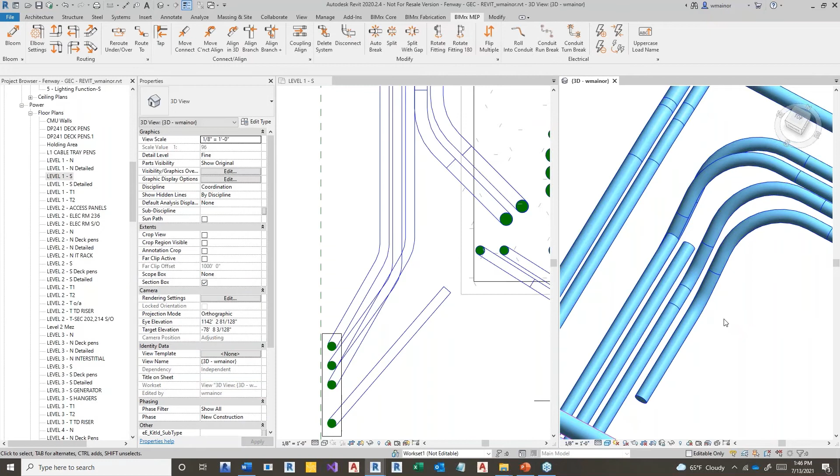And this takes 2 conduits or 2 pipes or 2 families with connectors, and it simply aligns the second thing to the first. So it doesn't make a connection, but it just sort of gets it in the right place, so that I can use the move and connect command to attach them. Okay. So without using that roll into command, we can still create the same complicated combinations of fittings that we could otherwise. All right.

Let's jump over to annotation for a second, because we talk heavily about the tools that are there for speeding up the process of modeling pipe, conduit, and I can show you some duct with time permitting, but we're getting very close to the end. We also understand that for MEP designers, tagging and annotation is a big part of your workflow, and especially for electrical designers, you'll spend more time tagging than you will actually placing fixtures and circuiting.

So for that reason, we have a command on BIMrx core called tag select. And the command allows us to build out a schema, or sort of like a template for combinations of tags. So for example, if I want to put a light fixture mark ID on the top left. And in fact, since this is a training webinar, I am going to start from scratch. I'm simply going to add 3 tags that I want for my light fixtures.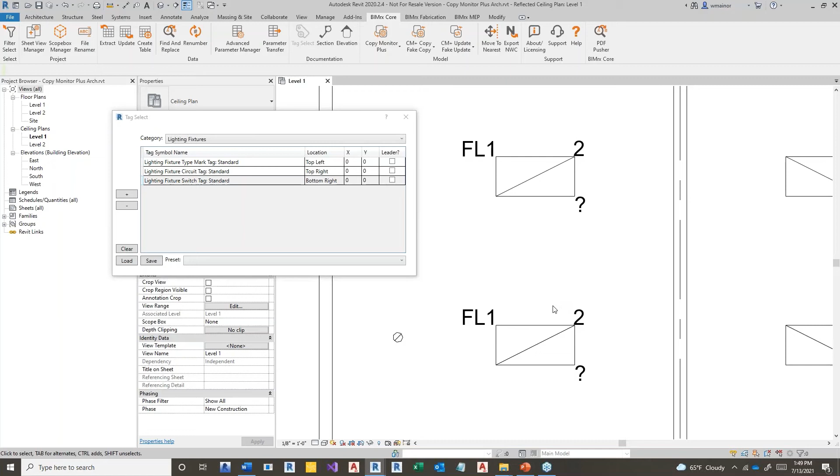But let's test this out, there may be some trial and error. I'm going to select a couple troffer lights, and admittedly I've already built my tags so that their insertion point is relative to where they would land next to the light fixture. So in this case we can see that my circuit tag kind of lands a little bit close, so maybe I want that to move a little bit in the X direction. Why don't I just put, let's see what 2 inches looks like.

With the dialog box open, I can use my undo command, and that's okay. It simply undoes the work inside of the model, not the work I've done inside of my tag select command. I click on the light again, and now that 2-inch offset seemed to help with my circuit tag. And maybe with the can lights, I'm pretty happy with that as well. So I'm just going to undo that, and I'm going to zoom out.

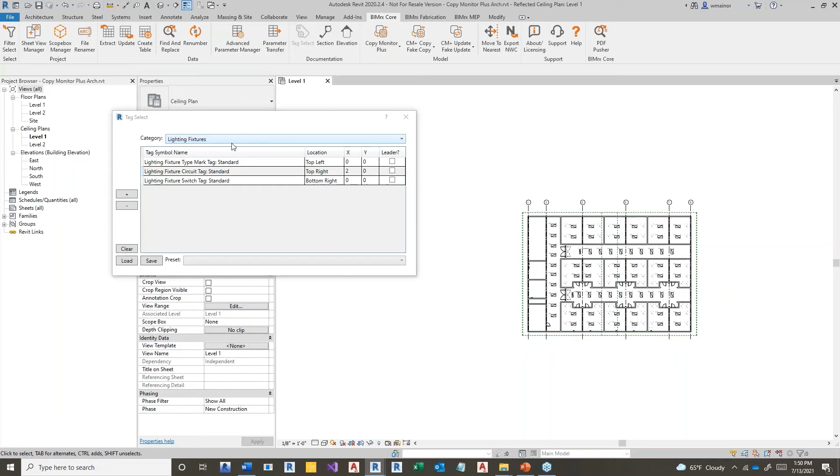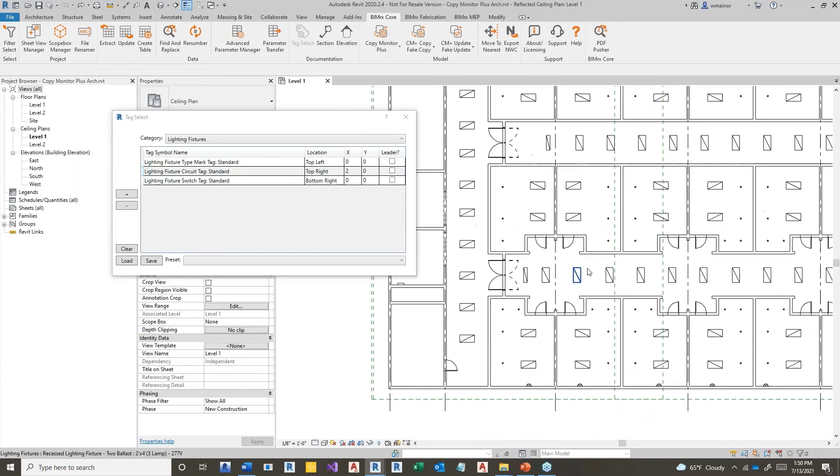The command allows me now to just basically select everything inside of the view, and it's going to filter out the selection set based on the category I've got chosen. Then it's going to go and place all of the tags for me. And of course, there may be some families that have custom geometry or hidden geometry inside of them, so for a floor plan it may not always be perfect, and we might have to go back in and correct some things. However, understanding that, we've got some ability to control how we're tagging.

So let me close, let me save my options here. I'm going to call this fixture tags, July, what's today, the 13th? I'll close the dialog box.

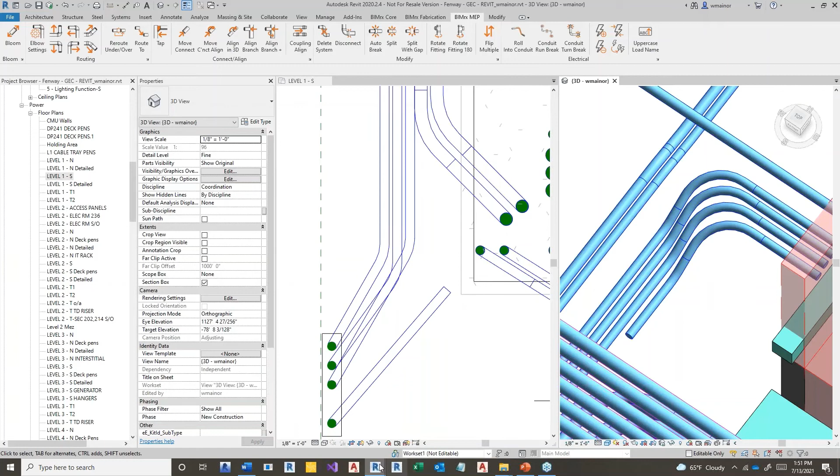And then what I could do is, we've got out-of-the-box commands inside of Revit, which would allow me to select all instances visible in the view. I can use HI as the keyboard shortcut to isolate them. And now I could come in and I could use my tag select command, select all of the lights, let them get tagged. I close the dialog box, and HR is the keyboard shortcut to restore hidden elements.

Then I can select my can lights, and there may even be a keyboard shortcut to select all instances. Then I can HI, and go back into my tag select command on the BIMrx core tab of the ribbon. And now we notice that the offsets were a little bit off.

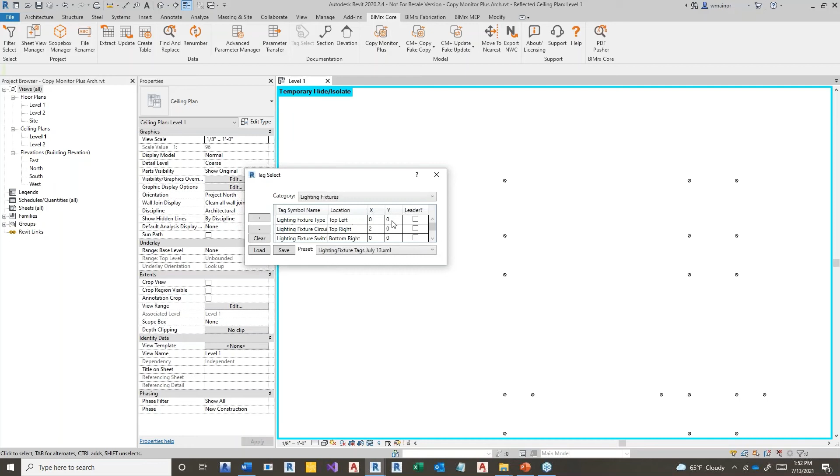I'd like to bring them down in the Y direction. So a negative direction is going to get them closer to the light fixture, a positive direction gets them further away. And we're talking about dimensions in inches in model space. So I'm not sure if 3 inches is going to do it, but let's give that a shot.

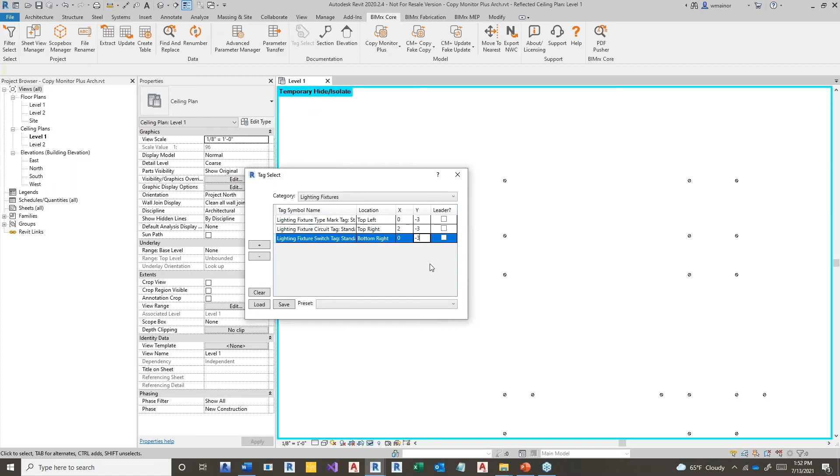All right, that's not bad. Maybe I'm just going to go -3 for all of them. It takes a little bit to set up, but if I can tag everything quickly, I think that actually looks really good. So I'm going to undo. I'm going to save this as a preset, lighting fixture tags can.

And then I'm going to zoom out and I'm going to select all my can lights. The software is going to place all of my tags. I can close the dialog box and type HR to restore all of the hidden elements. And just like that, like I said, you're going to have multiple different styles of lights, and the same configuration is not going to be appropriate for every family. But nevertheless, the fact that you can take all families of a certain type and isolate them very quickly.

Now, speaking of isolation, there's one thing I want to show. I'll take 2 more minutes of your time, and then we'll check the questions. So why don't I check the questions right now?

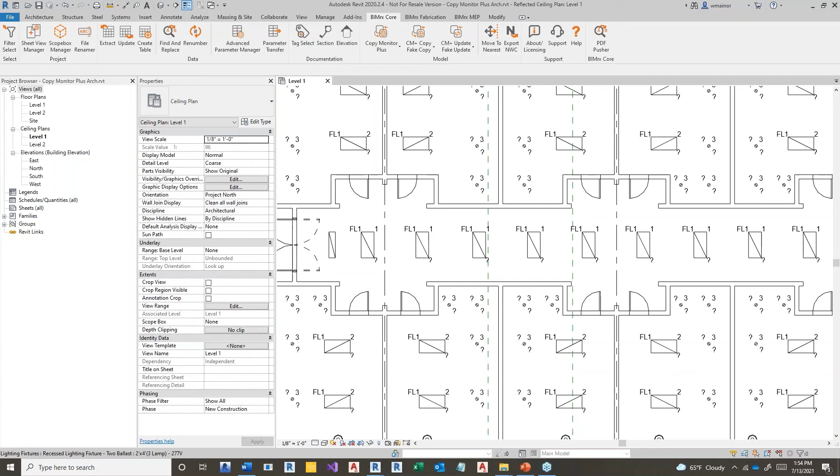Okay, let's come back here for a second. One more thing I wanted to show you: if I come back and select everything, I'm going to select all of the tags and delete them. BIMrx Core has a command called filter select.

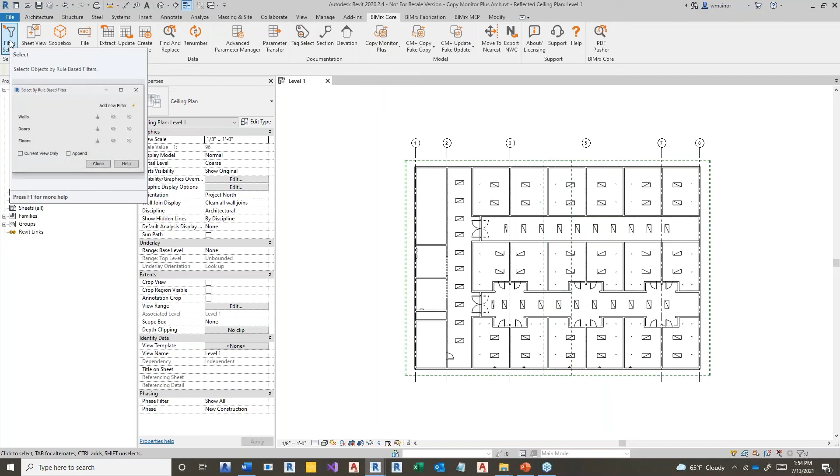Filter select gives us access to all of our view filters, which we can use to select elements. I talked about using the tagging command to select all instances, but a lot of times you're going to have multiple different family types with the same geometry. Like here we've got a recessed light fixture 2 ballast, or say it's a 120 volt LED light. Here we've got 2 lights with more or less the same geometry, and they should all get tagged similarly, but if I right click and select all instances, it only picks up the one element.

Wouldn't it be great if I could select all light fixtures that came from the same family? BIMrx has a command called filter select, which gives me access to all of the view filters in the project. I can add a new filter, and this takes me to Revit's filters dialog box. This isn't a custom proprietary window—we are using the view filters as Revit intended them.

So I'm going to create a recessed filter. It's going to look for all families of the lighting fixture category, and as a rule, I'm going to search for everything with a certain family name. Let's see what family names we have.

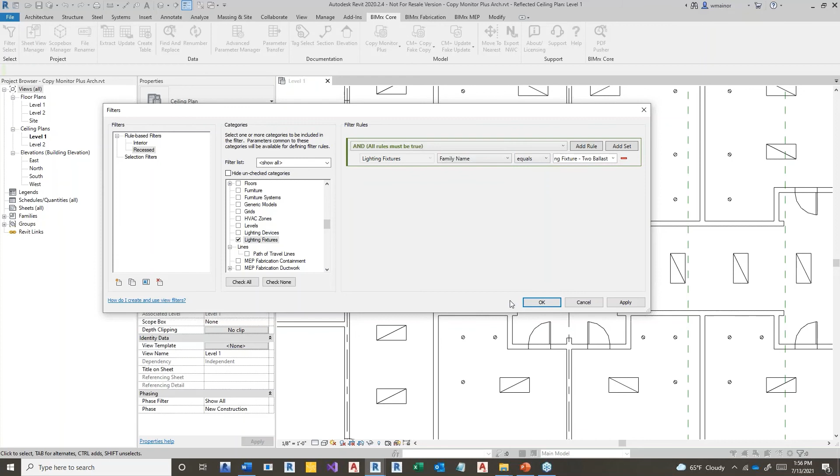Recessed light fixture—I'm going to find everything that came from that recessed light fixture 2 ballast. Otherwise, I could select things that began with, like everything that has recessed in the name, or everything that has 2 ballast in the name. Well, anyway, that's my filter. Now I can use the filter select command to either select and hide, or select and isolate.

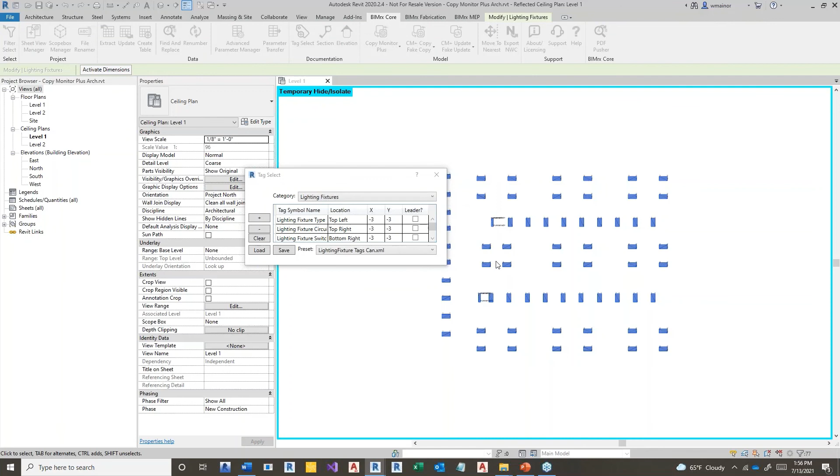Now they're selected, I can go back into my BIMrx Core, tag select, and of course three things couldn't be tagged. I'm not sure why—the offsets aren't quite right because this was set up for my can lights, but you can see they're a little bit off. What I would just do in this case is undo, Control Z.

I'm going to load in the preset, and then select all of my recessed lights, and I think we're going to get much better results in this case. There we go. I've got a couple things that are on undefined circuits. So now I can close, and all the filter select command did was run Revit's select and temporarily isolate.

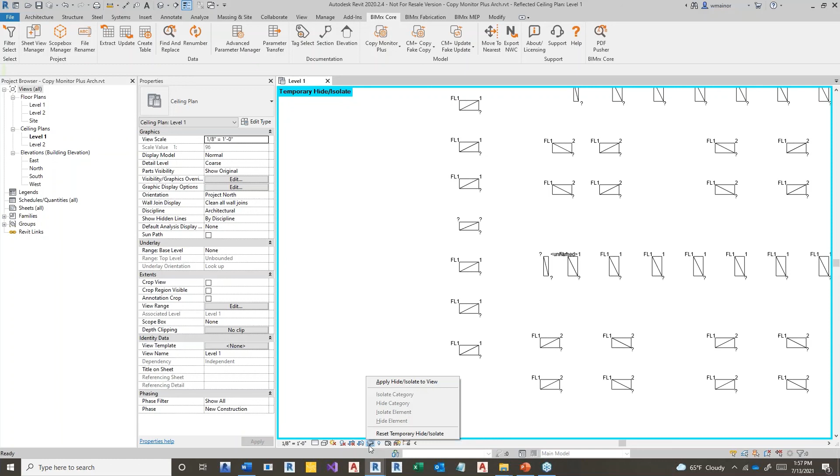Here, earlier when I typed the HR command, what that was doing was giving me quick access to the icon at the bottom of the screen that looks like sunglasses, and clicking on that reset temporary hide isolate for me.